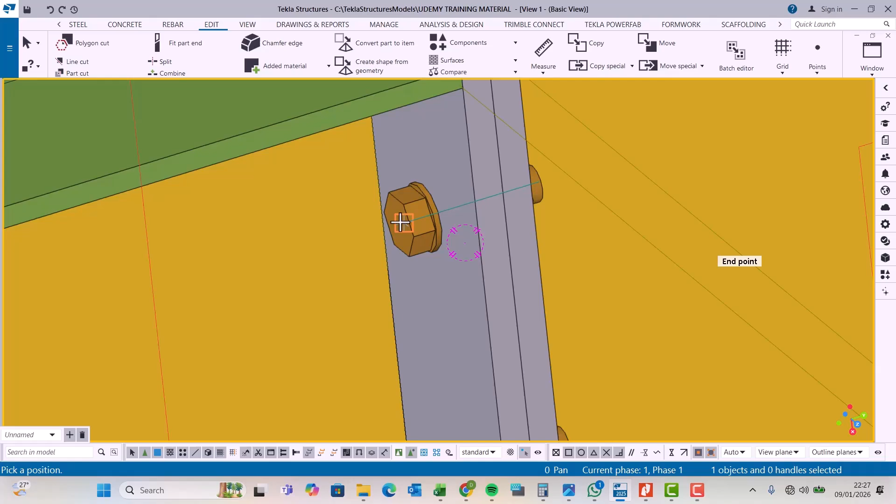Now, let me switch back to the Tekla Structures environment, and this is where we are, and we want to place the stiffeners. So we use the bolt center to center to create some guidelines in creating the stiffeners. So I'll come to edit and come to points here. I'll come to any point and I'll snap. Let me just try snap right at the center there and right at the center here. I'm not really getting the center point of anything here. Let me just turn it into a meaningful rotation, and it appears that the placement of our points is wrong.

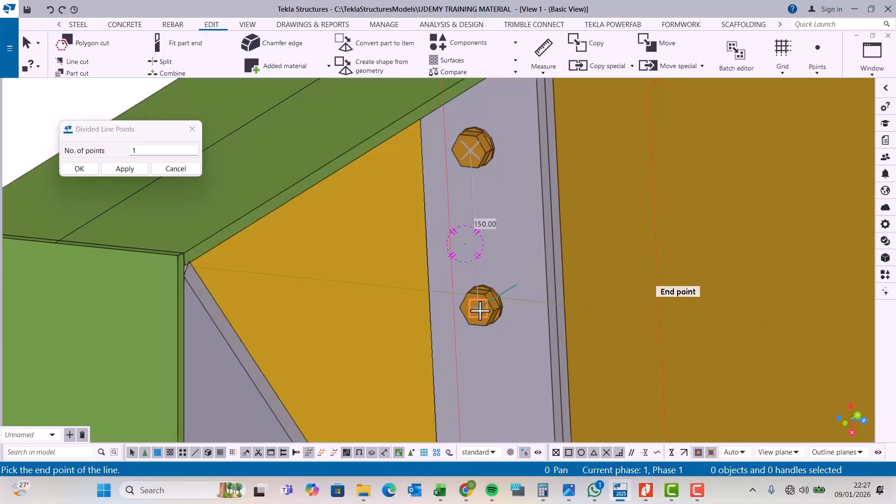So I'll just click undo, and I want the exact centers of our bolts, because I want to use the bolt centers as a guideline in placement of our stiffeners. So this is the center point of our bolts. So I want to use this center line to snap at the edge of this plate.

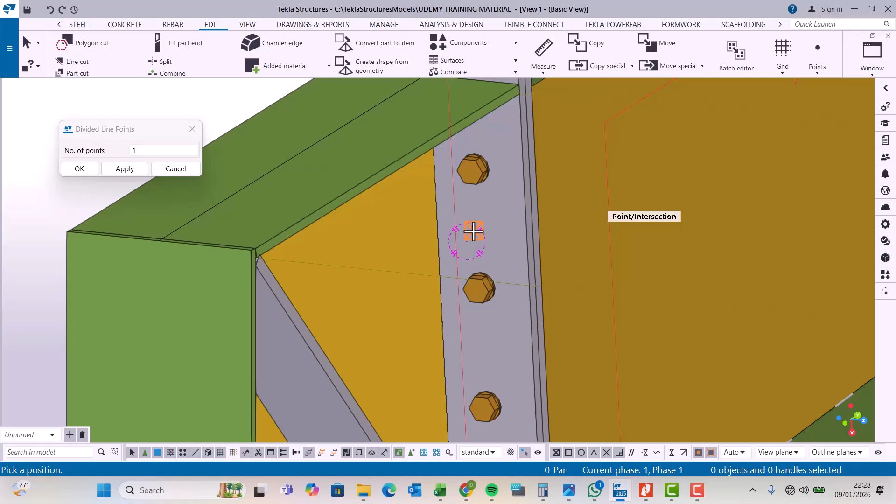So I'm going to pick on that option of point and pick at any option, and I snap on this point and mouse over this, and I'm not able to snap on it. So let me activate that, and I'll be able now to snap on it. Right click and come to perpendicular, and I'll be able to snap on that spot. Once I've snapped on this spot, I'll come back to point once again and select on it, right click and come to perpendicular, and I'll select on that spot.

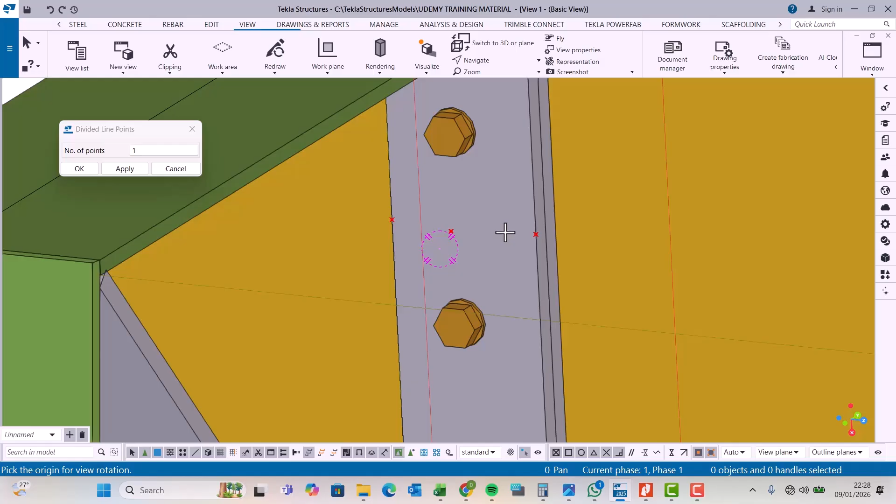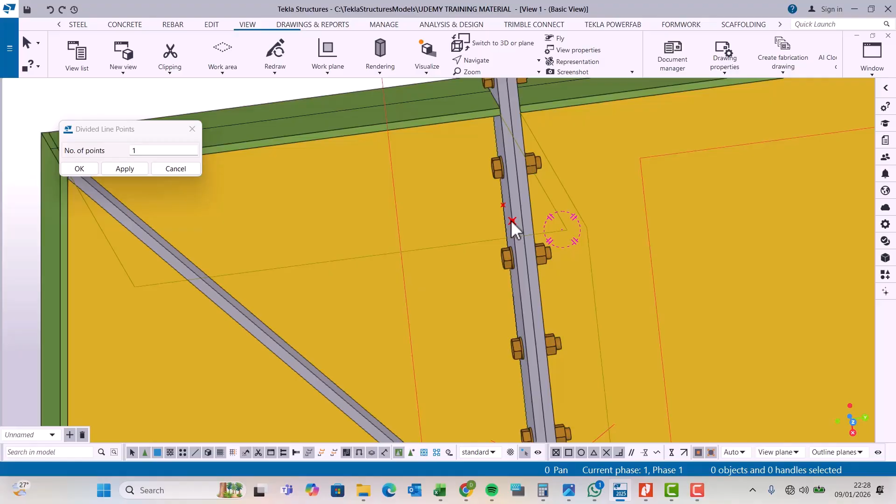So I'll rotate this. If I turn it like this, we'll be able to see, but this point is useless for us. Let me just remove it. We have these 2 points. But prior to copying the 2 points, check the orientation of your axis. I want to copy this point and that point along the y-axis, but in the opposite direction. So the y-axis is here, and I want to prefix my dimension with a negative sign and key in 100 millimeter. So I'm going to click copy.

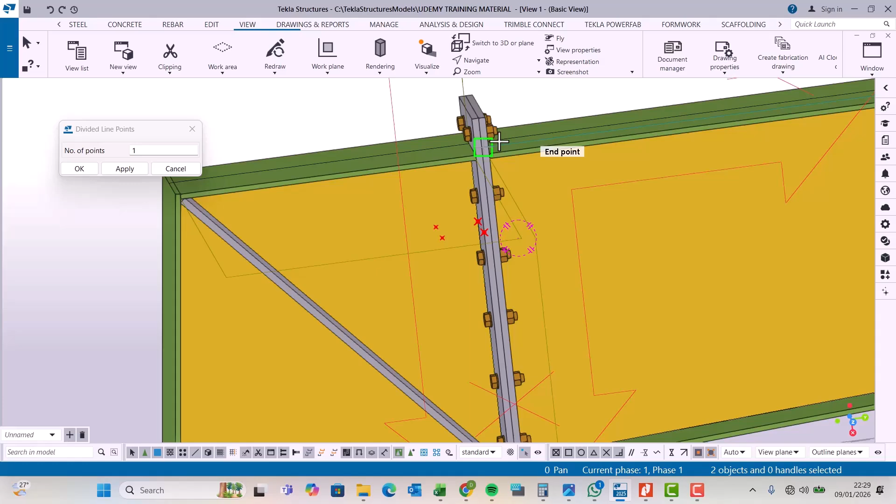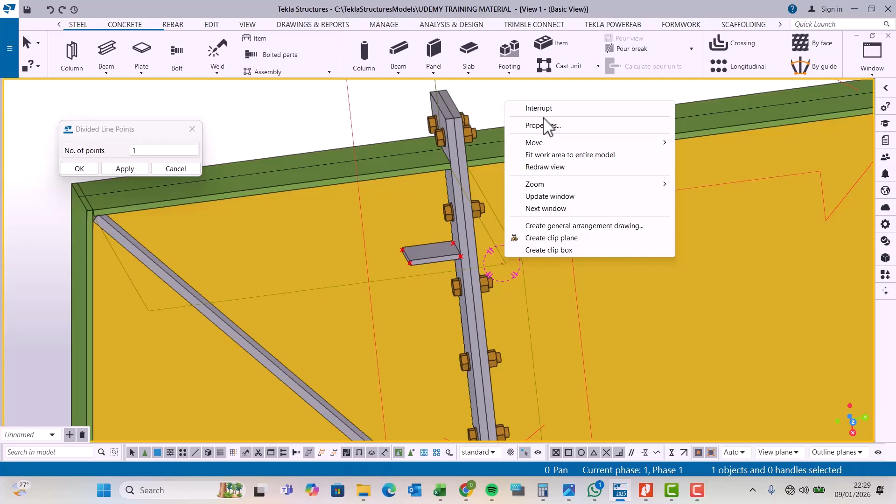Once I've copied that, I'm going to create a plate here manually by coming to plate, and I'll snap on this spot, that spot, that spot, and that spot. I've created a plate. So this plate will be welded on this end plate. What do I do now? I'll refresh that, and I want now to chamfer this plate.

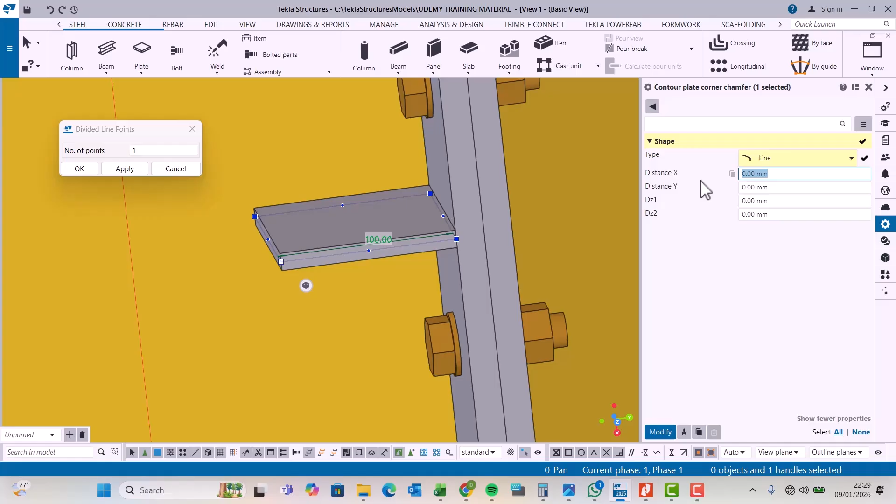Once I've selected that plate, I'll double click on this corner, on that node. Select the plate and double click on the node here. This will bring the contour plate dialog box where we'll be able to chamfer, or it gives options for chamfers, fillet, and all that. So we want to chamfer this. Our chamfer will be 30-30. Let's try 30-30 if it will work for us. 30-30 will be okay. Let me try 50 and see where 50 ends. For 50-50, that will be okay.

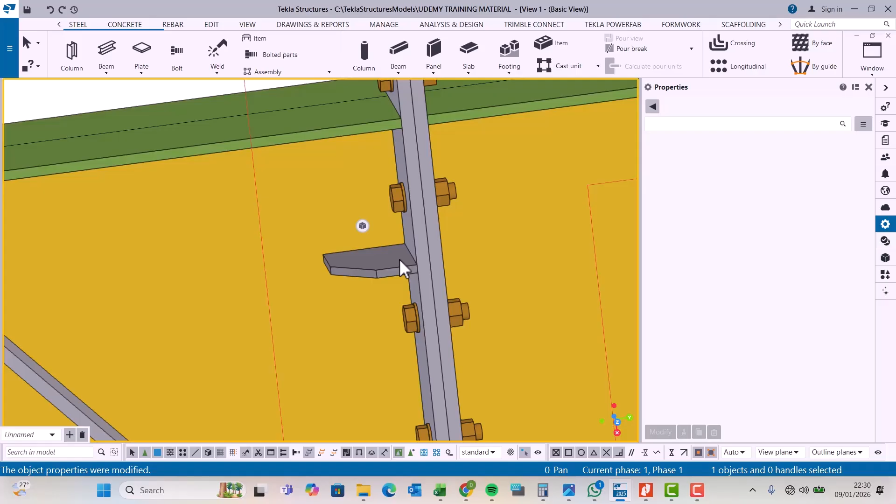Now, I'm going to select on this, right click and come to copy. Once I've copied this, I'm going to turn this into a position where I'll be able to copy this accurately. So I'll copy it from this center here, but it's not pinned right at the center.

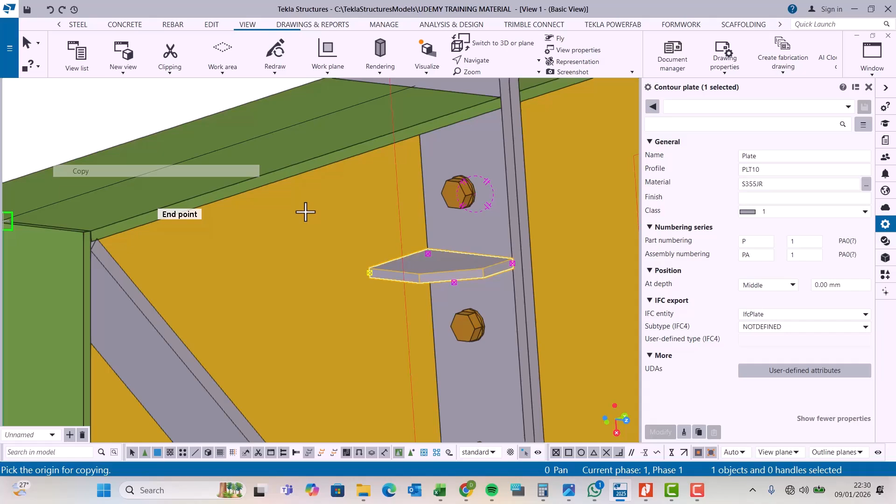Since I've selected on this, I'll right click and come to copy, and I want to snap right at the center of that bolt, and snap right at the center of that bolt.

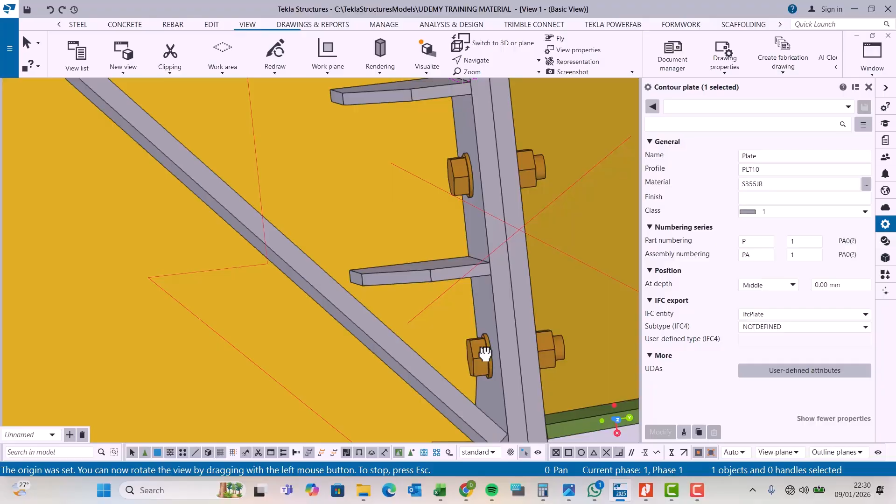So let me come to navigate and pick rotation by point, and we have though the bolting of this member will be a little tricky, but that shouldn't worry you. We can either get rid of it or you can just leave it where it is.

Remember, first of all, this will be welded to that. I'll show you the procedure of doing those welding. So I'll select this stiffener, select that stiffener, select on that stiffener, and on this. So there's a stiffener we've left outside, this one here.

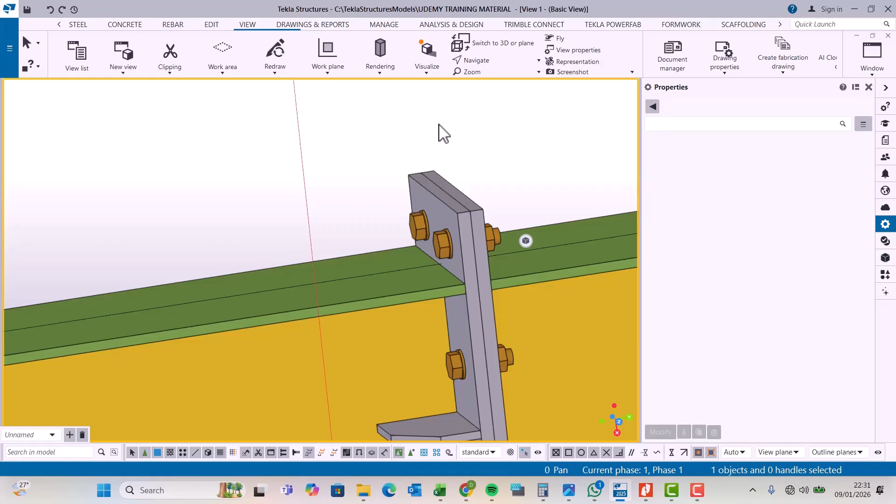So how do you create that? I switch back to grid line, elevation view, and I want to create a stiffener here. So I'll create a point. I'll snap a point right there.

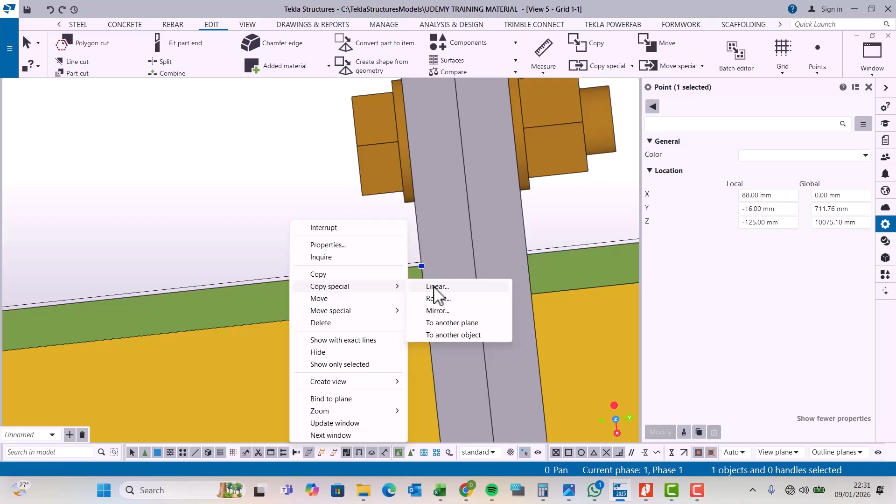So on that point, I'll give it a special copy, linear, and I want to copy it along the y-axis by probably 100 millimeter, but prefixed by a negative sign right there. Give it a negative sign.

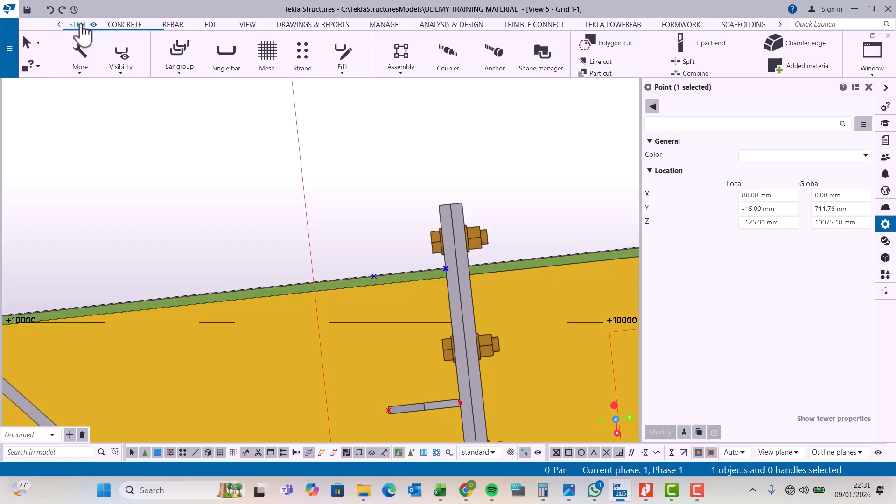Click on that, and I want to create a plate. I want to create a stiffener plate. I'll come to steel and come to plate right there, and snap on that spot, snap on that spot, and snap on this spot. I've created a plate right there. So this is a stiffener we intend to have.

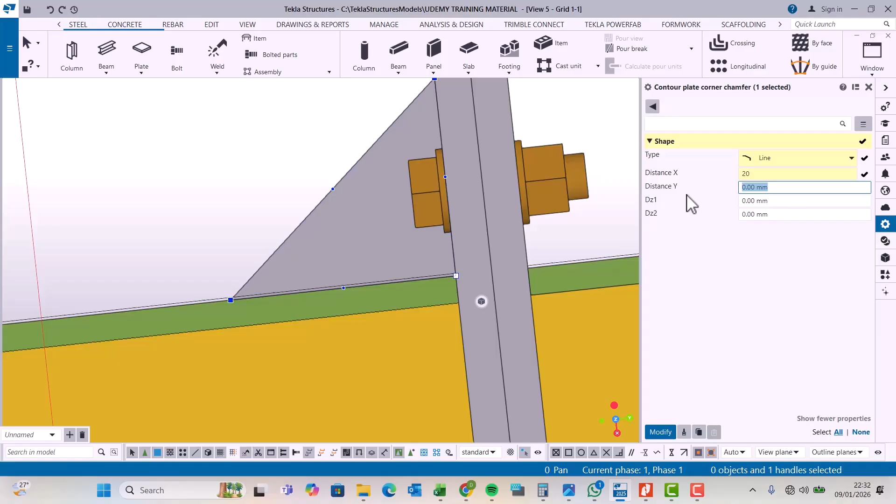So I can double click on that, and maybe create a chamfer there. Maybe 20x20 probably will make sense to me, and I click OK. So we've chamfered that.

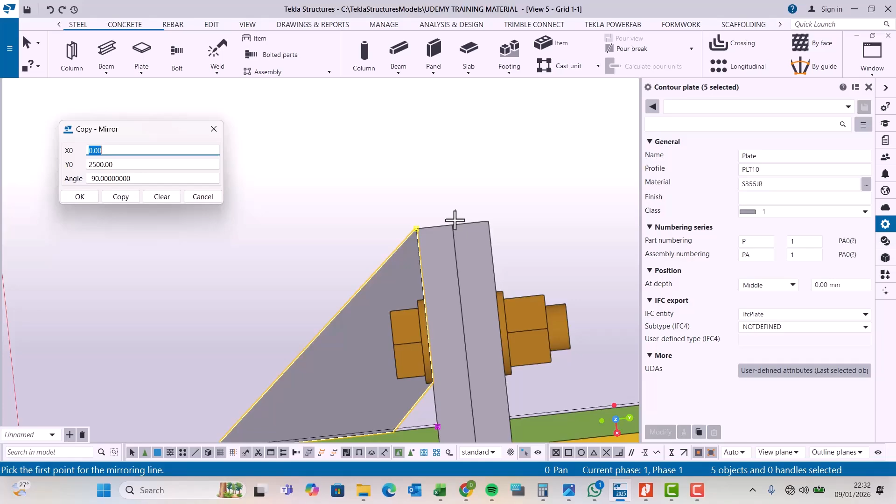So if I come here and select all these stiffeners, remember that we are customizing our joint, our knee joint. I'll come right here, right click, and come to mirror, and I want to use the center of these two plates as my mirror line. So I'll click and define my mirror line like that, and click on that, and click copy. So if I click copy, I will have everything mirrored to the right position.

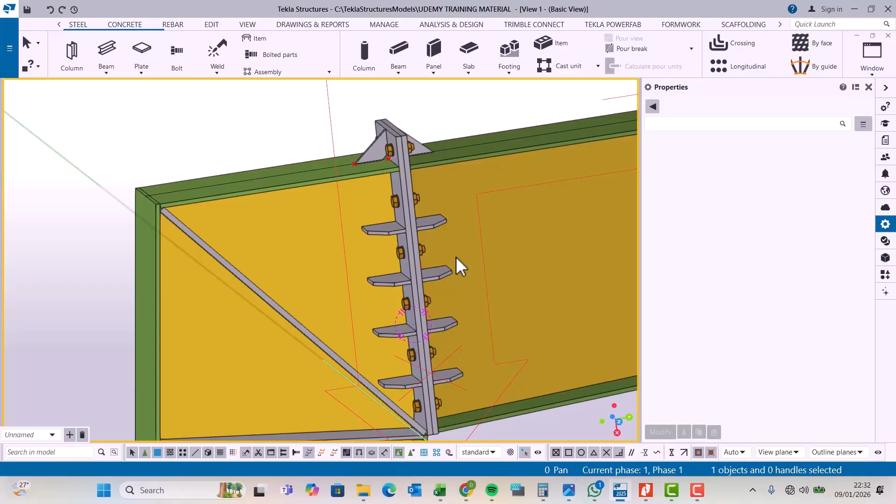So let me switch back to isometric view and check if what I've done, if what I wanted has been done perfectly well. Actually, it has been done as I had expected. So if I turn it like that, you can see we have that in place.

So now I want to copy this on the other side, but we can't copy this if our XYZ plane is placed in that position. The way it is, it won't copy, it won't mirror.

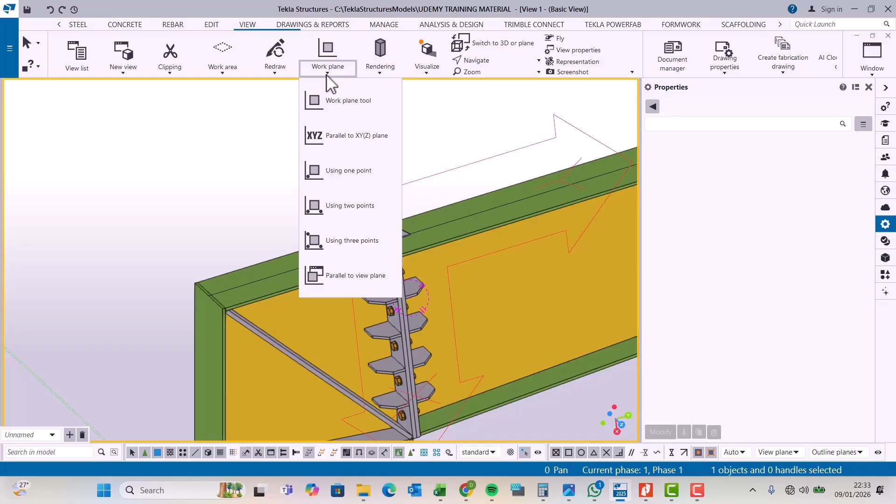So let's switch back to view and come to workplane tool. Let me just drag this, let me just remove this recording symbol here, it is obstructing me. Now I'll come to view right here and come to workplane tool and click parallel to XYZ. This will change it to global position.

So I want to select all the stiffeners that I intend to mirror on the other side, and select on that while holding the control key on my keyboard. So I want to rotate this.

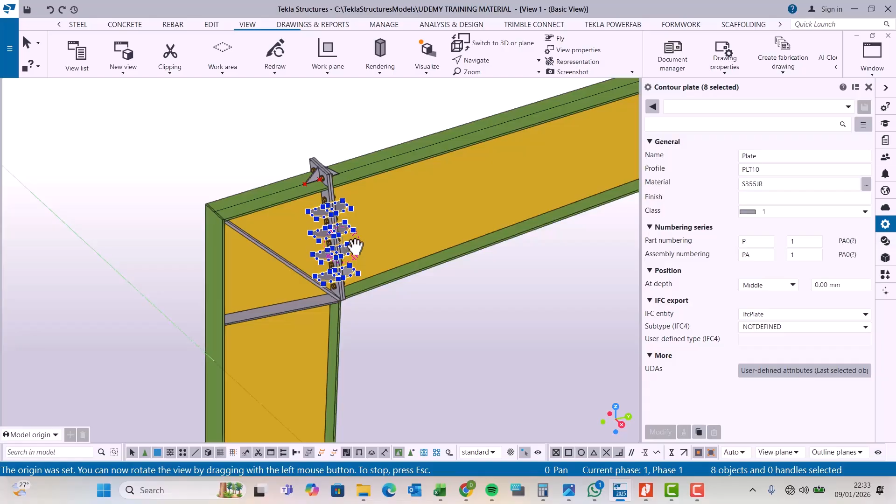So once I've rotated this, I'm going to right click and come to special copy and pick on mirror. So I'm going to define my mirror line on the 2 points and click copy. Once I've done so, I'll right click and come to interrupt and rotate this.

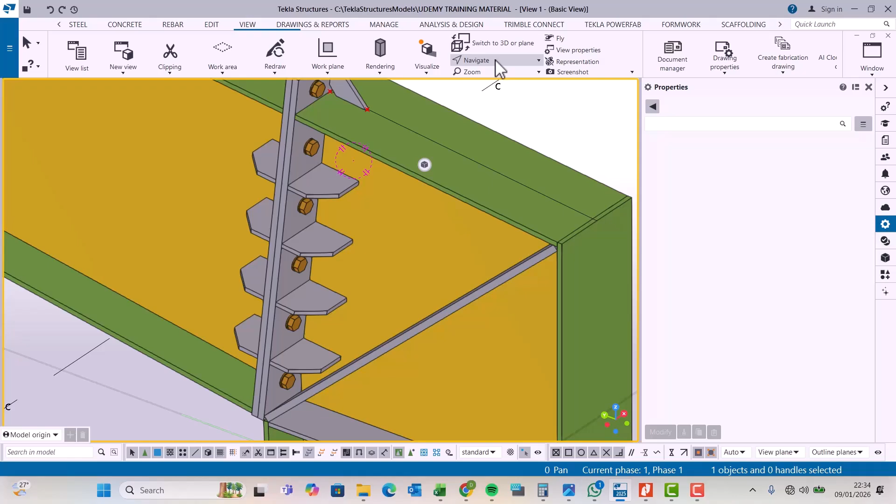If I turn it like this, you'll be able to see I have my stiffeners already placed in the right positions. Don't mind about how we can bolt this, that we have many options. You can remove it, or you can just leave it where it is.

So we have created a knee joint between the rafter and the column.

So the other part remaining is creating this end plate connection and the apex connection, which I think will be handled on the next topic. So let's meet then, and bye bye.